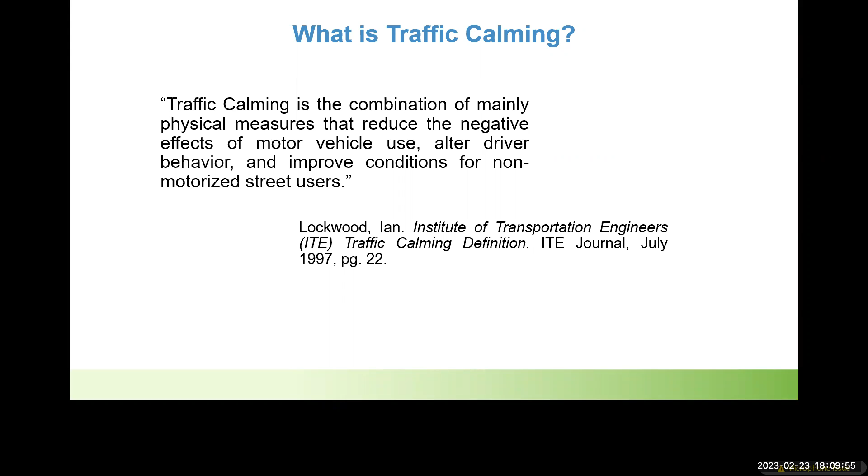The traffic calming program in Ann Arbor is designed to provide residents with a formal process for engaging with the city in a partnership to perform a technical analysis of traffic concerns on local streets and explore potential solutions. It's a 5-step program. We'll briefly describe each step, but there's also a guidebook available online that has more detail on each step and the structure of the program if you want to review anything after this meeting.

Step 1 is the resident-initiated petition. The Fulmer Street project started with one of your neighbors acting as a petitioner who submitted a request to the traffic calming program that defined the area as Fulmer Street between Miller Avenue and Foss Street. They gathered signatures from other residents who lived in the defined area and submitted it to the city.

The requirement for the traffic calming program to accept that request is at least 50% of the defined project area must support the project, and a preliminary technical study must result in at least 10 points. So there's all the criteria that goes into that scoring.

This summary is available on the project website, but this is just to show you that 54% of the project area addresses signed the petition in support of this project, and your preliminary study resulted in 22 points. If you want to look at the detail of how those points are broken down, it's available on the project website, which I know I keep referencing. If you didn't catch it at the beginning slide, it'll be up there on the last slide.

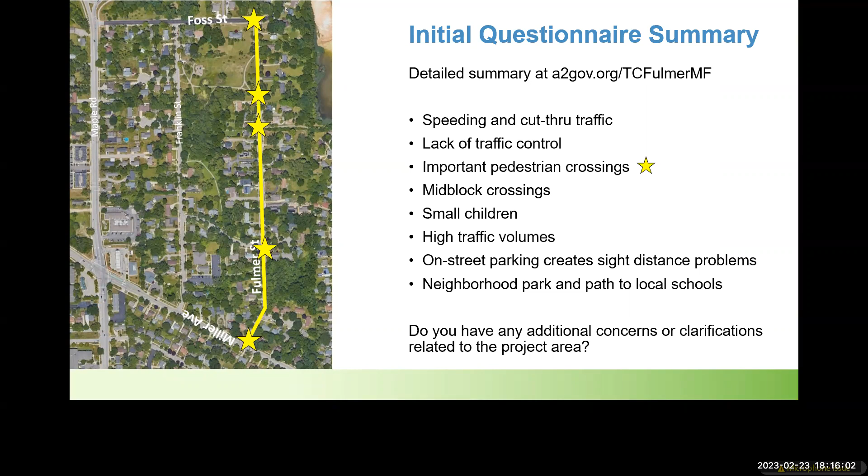Okay, so I'll definitely take note of that, thank you, that was helpful. So that feedback, and then what we've collected from the initial questionnaire, that's what we took in developing our starter idea here in step 3.

So step 3 is where we are today, where most of our focus will be for the rest of the meeting. But before we present the starter idea and do the polling, we'll do an orientation on the device toolbox that's described in the program's guidebook.

I'm going to launch another poll. This is just a quick poll to see how familiar people may be with the guidebook. Question reads: have you reviewed the traffic calming guidebook, specifically the device toolbox found on pages 9 through 12?

We'll give it just a moment or so longer before we end the poll and share the results.

So it seems like most people, majority of people have at least looked at it. Some might need a refresher, but we do have some people who haven't had a chance to look at it yet at all. So we will kind of speed through, but want to make sure we pause for any questions along the way.

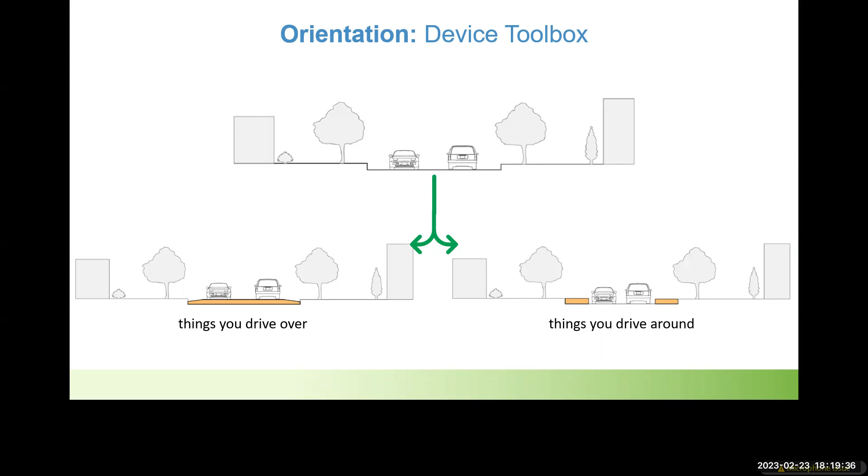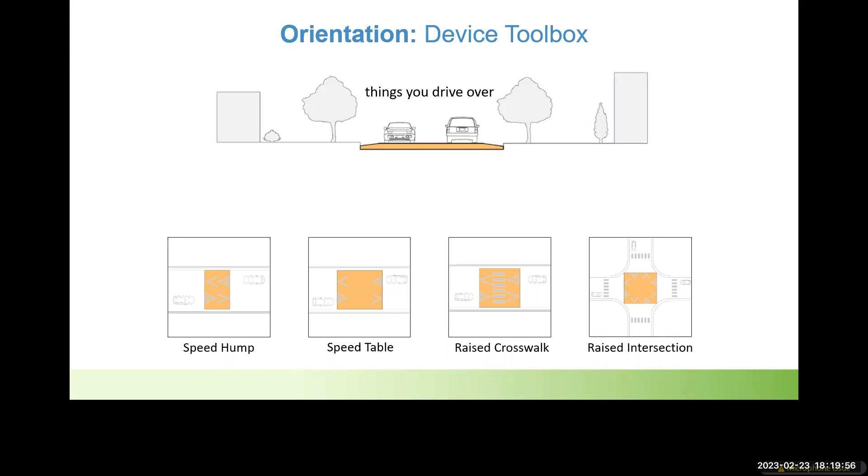Things you drive over are devices that slow traffic by creating discomfort if traveled over at a speed exceeding 25 miles an hour. The toolbox presents 4 devices that fall under this category, including speed humps, speed tables, raised crosswalks, and raised intersections.

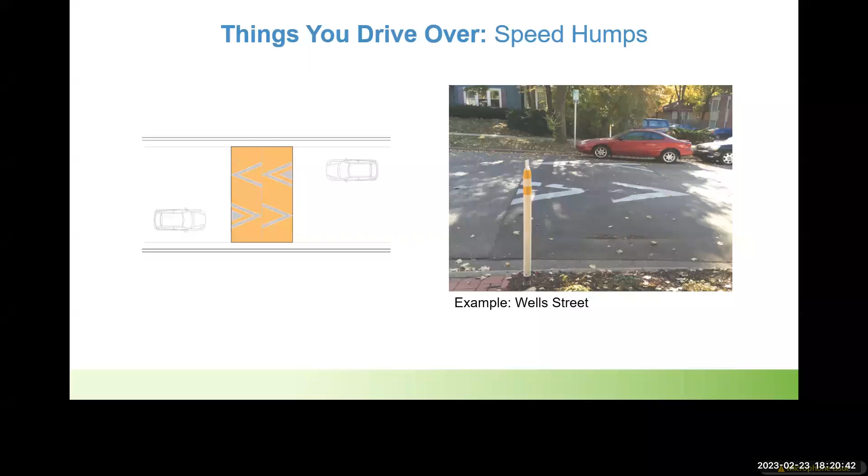A typical speed hump diagram is shown on the left, and an example from Wells Street is shown on the right. Speed humps are typically 12 feet long, 3 inches high, have a parabolic shape, and extend the full width of the street except for the gutter. Studies have found benefits from speed hump treatments, including speed reductions, traffic volume reductions, and crash reductions. Some other notes: the height is designed for ease of bike usage and bike safety, and if previously permitted, vehicles can park on speed humps. Also, trash cans can be placed on speed humps if necessary.

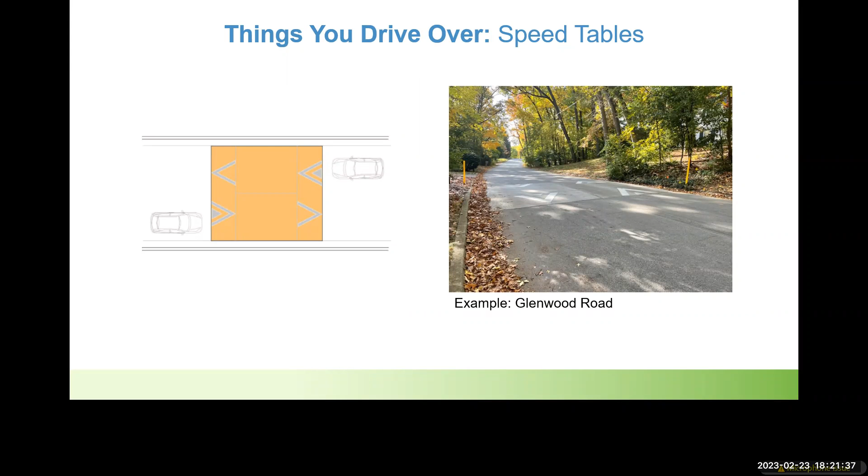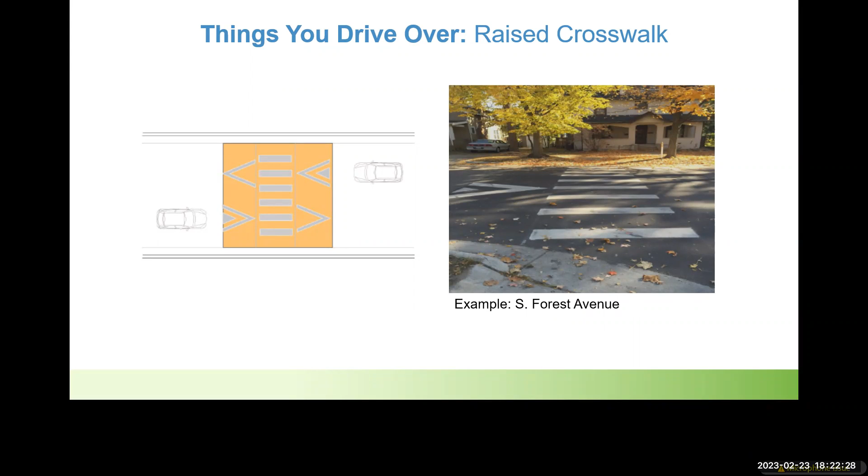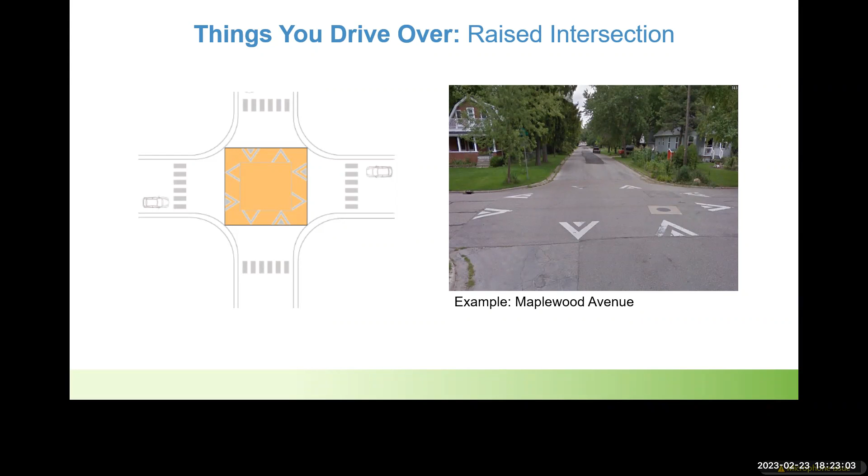If there are any questions about devices you drive over, please raise your hand or use the Q&A function. Okay, I'm not seeing any questions, so we'll move on.

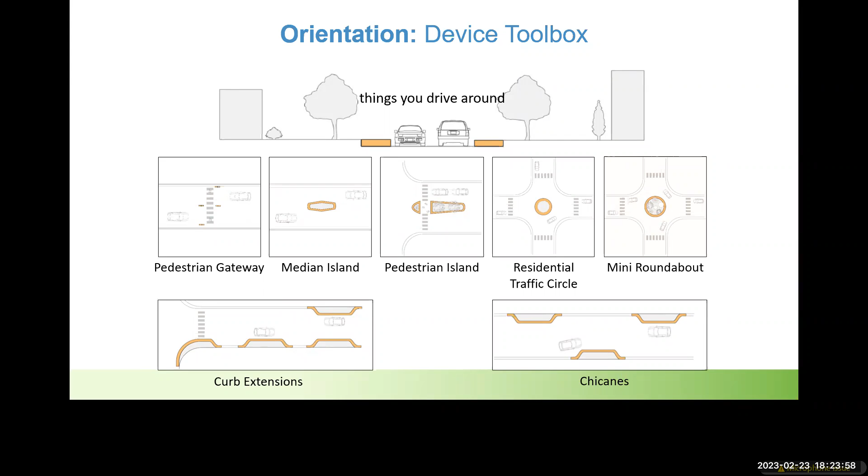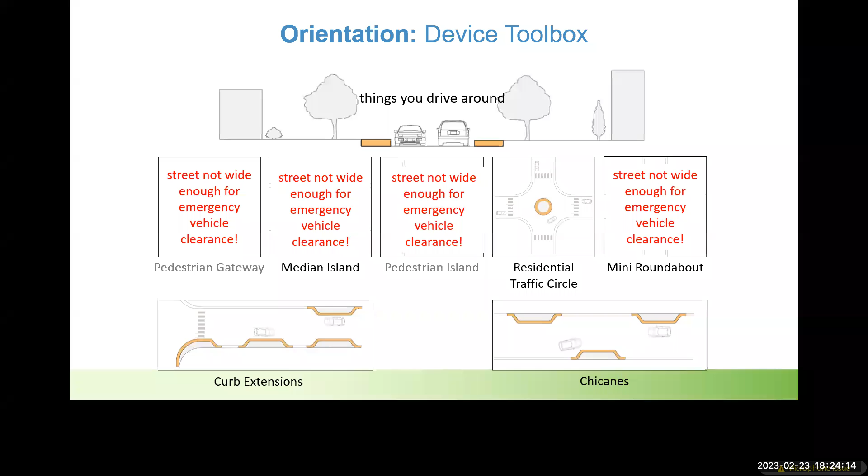The other group of devices in our toolbox are things you drive around. This type of device slows traffic by creating the perception of less room for error in a road that's visually or physically narrower. The device toolbox presents 7 devices that fall under this category, including pedestrian gateways, median islands, pedestrian islands, residential traffic circles, mini roundabouts, curb extensions, and chicanes. The next few slides will describe each of these devices except for pedestrian gateway and mini roundabout. These devices have been omitted from this project due to street width requirements set by the fire department and conflict with existing traffic controls.

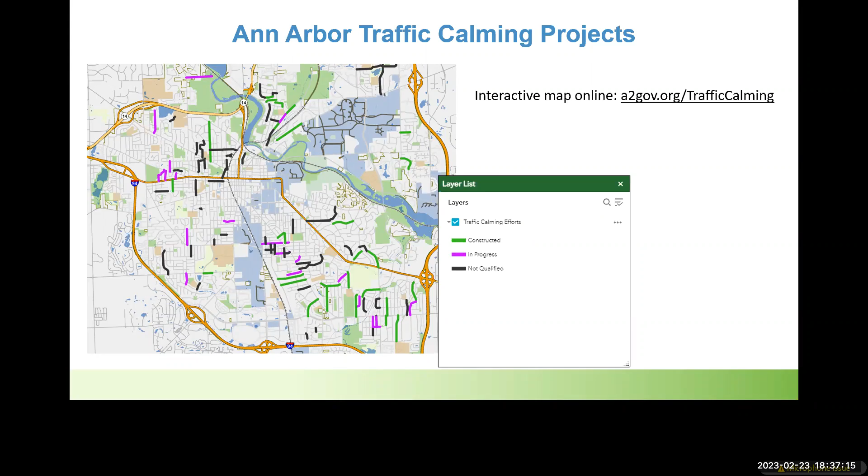Okay, so now that we've covered what devices from the guidebook are applicable to Fulmer Street, we'll present the starter idea. Again, this is a draft plan that we've created based on the data collection, including feedback from the initial questionnaire and that preliminary traffic study. We'll show each of the proposed devices in the plan, then take time to discuss and answer any questions, and then we'll do polling. This is the starter idea, again the draft created from information gathered in steps 1 and 2. We've proposed 4 devices throughout Fulmer Street - we see them working together to create a traffic calming effect on the entire section of Fulmer. I'll go through each device one at a time, get some feedback, and move on to the next device.

Device number 1 is a raised crosswalk at the Garden Homes Park entrance. There are currently sidewalk ramps on both sides of the street, and because those ramps already exist, we chose to put a raised crosswalk there. There aren't any other signs or facilities to alert drivers that pedestrians may be crossing, but since there are already sidewalk connections, we can install a raised crosswalk that highlights pedestrians, raises them up—especially shorter persons—and provides pavement markings clearly defining that area.

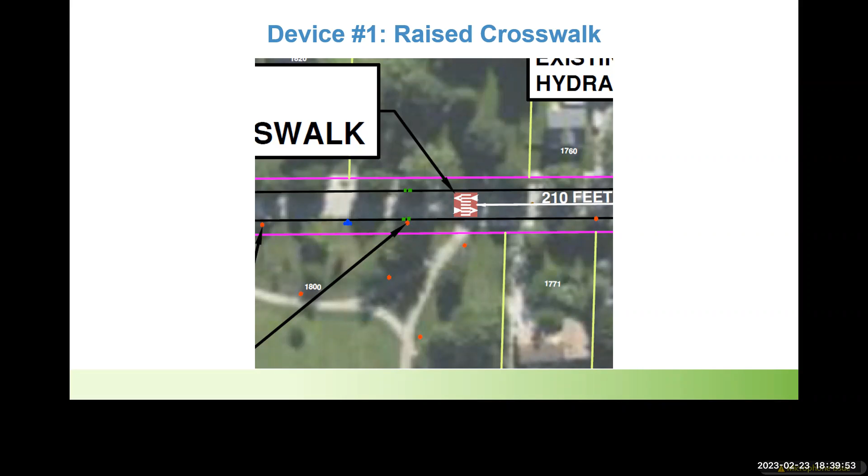Were there any questions on raised crosswalks in general or this specific device? No, I don't see anything. I'll move on to the next device.

Device number 2, we've proposed a speed hump, somewhat between 1658 and 1660 Fulmer Street, between the path to the Hatcher Crescent neighborhood and Garden Homes Drive or Garden Homes Court. Some initial questionnaire responses stated there used to be speed humps along this street before, and there was some favor for using them again. This location was chosen to give proper clearance from the fire hydrants on the street, account for the driveways, and keep it spaced between the other devices as much as possible.

Speed humps can also result in speed reduction, traffic volume reduction, and crash reduction. Some things to keep in mind: legal on-street parking is still permissible on speed humps, and they're designed to be safe for vehicles and bicyclists to travel over—the maximum height is designed so it's still comfortable for bikes to ride over.

Were there any questions on device number 2, or speed humps in general? Go ahead, Ruth. Okay, can you hear me? Yes, all right.

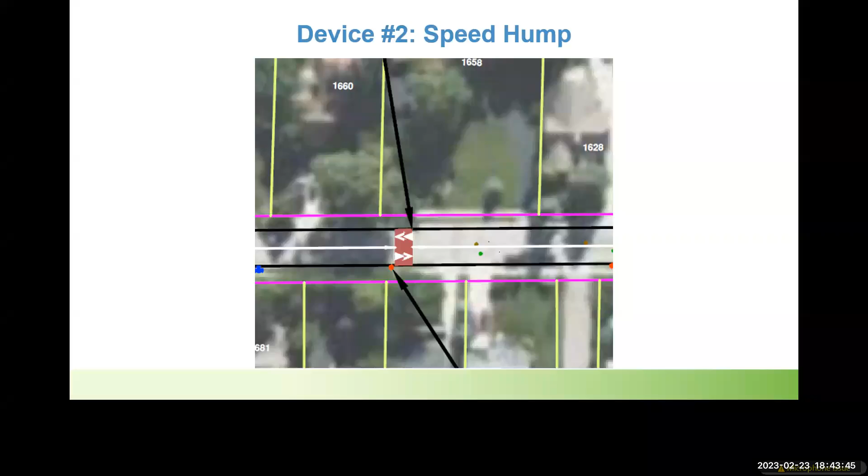Device number 3 is a residential traffic circle at the Garden Homes Drive, Garden Homes Court intersection. Again, to achieve a traffic calming effect throughout the entire stretch of Fulmer, it's important that devices are spaced as equally as possible, so given our constraints, we knew we wanted a device here.

Traffic circles don't change existing traffic control, and their size is pretty small. Garden Homes Drive and Garden Homes Court both have stop signs at their approaches, while Fulmer Street is free-flow traffic, and that wouldn't change. We wanted to maintain the traffic control that's already there since we can't add anything like additional stop signs.

But this does have the ability to reduce speed since it's something that drivers would need to navigate around. So those drivers coming down Fulmer would need to navigate around it. So it would be a device that can reduce mid-block speeds, intersection crashes, and overall crashes.

A couple things to consider with traffic circles is that they do have a minimal effect on cut-through traffic. Left turns might be difficult for larger vehicles. They might shift vehicles closer to crosswalks. Bicyclists navigate with traffic around the circle. Landscaping would not be an option in this project, just to maintain that emergency vehicle access, because they need to be able to drive over this if needed.

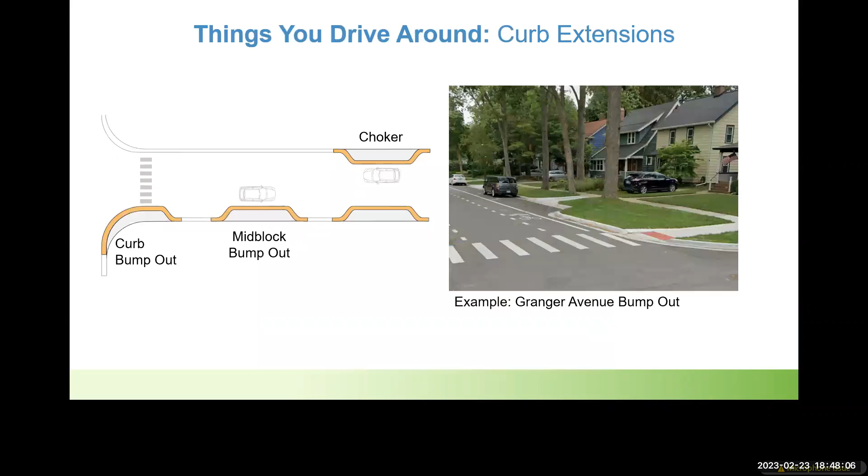There'd be a pole in the middle with a sign? Nope, no sign. That was a request from the fire department. There is regulatory signing that goes along in general with the traffic circle, but it could be placed ahead of the intersection. And in this case, since the fire department has requested the mountable curb and is possibly going to need their vehicles to be able to mount it, that's why the center is going to be paved for this option.

So Lori, Christy, I can add another example. I don't know how familiar all of you are with Broadway Street over by the hospital. They just put in a new one - it isn't a residential traffic circle, it isn't a roundabout, but it is a mountable one, similar to what the fire marshal is interested in. If you guys poll on this one and you're interested, we can add that image of what it generally would look like. It doesn't have anything other than mountable curb - it's raised, it's concrete, that's it. Thanks, Andrea. It's at Broadway Street and Gordon Lane. It's a very weird intersection, but an interesting one.

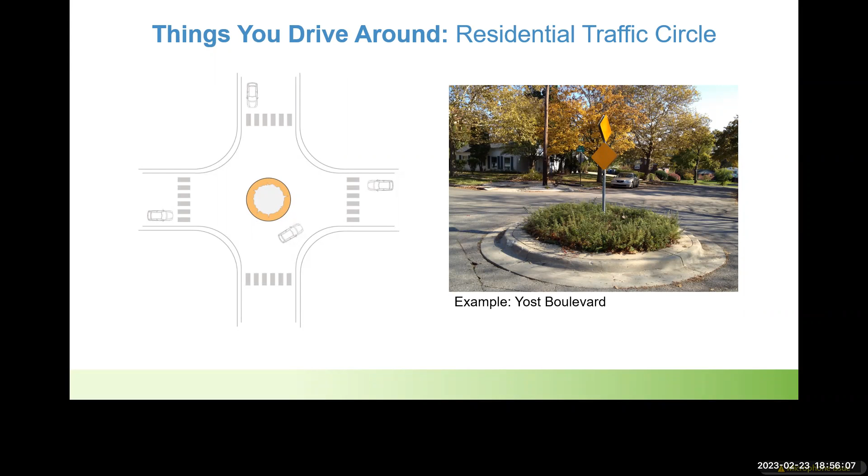Well, raised devices or any installed traffic calming devices should last the same length as pavement. They are inspected as needed, and we're in the process of creating a plan, because all of the devices that have been installed since 1996, when we first started installing them, are now just hitting the point where they need to be replaced, kind of like pavement.

So it's pretty much the same life cycle as the other stuff. I hope that answered the question. We're just now seeing that we have to start replacing and maintaining them. The pavement markings that go along with devices typically get refreshed as people go through the neighborhood, as part of our pavement marking contract.

If you notice there's an issue, we always send an inspector out to look. So if pavement markings look off, or a device has been destroyed because of—heaven forbid—something, we've seen very interesting things, we'll go out there, look at it, and get it put into the resurfacing program as a maintenance item. So hopefully that addressed your question. We're now just seeing that we're having to maintain the devices that were put in back in the 1990s.

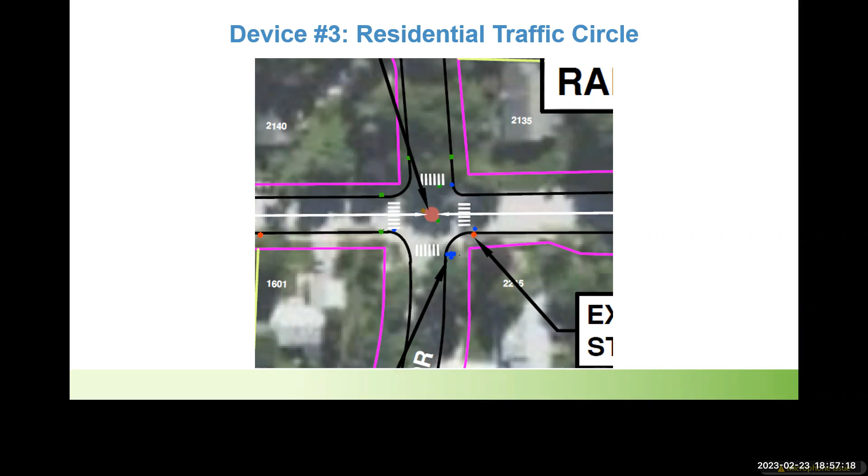So as a reminder, raised crosswalk treatments can show speed reduction, traffic volume reduction, overall crash reduction. Some things to keep in mind: installation has to be compliant with the ADA, Americans with Disabilities Act, and parking on a crosswalk is illegal, raised or not. So, none of these devices will take away any existing legal on-street parking.

So that's circling back and answering that other question. Was there any comment or question on this device? Ruth, you can go ahead. This is my husband, he has a question. Okay.

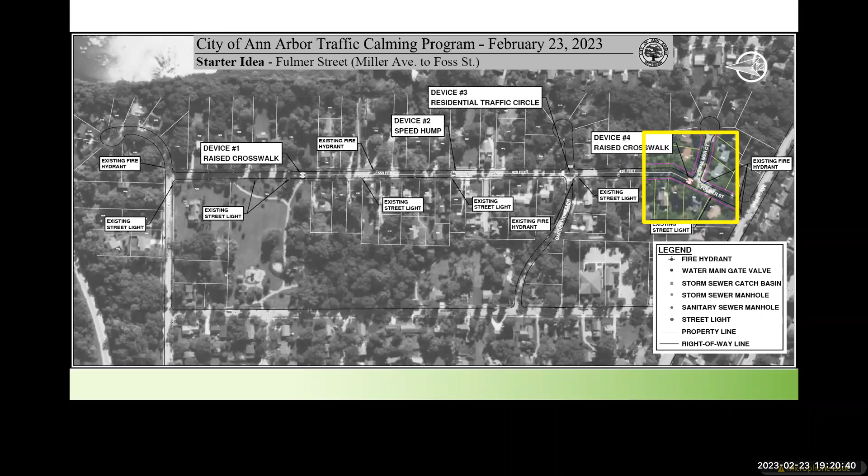Okay, beautiful. Polling's done, but before we wrap up the meeting, and before we revisit those couple devices or open the floor up, I just want to go over what the last few steps of the program are. So after today, the next step that you can expect is meeting number 2.

Meeting number 2 is going to consist of 2 parts. One is a self-guided tour, and then another meeting just like tonight. That meeting is scheduled for May 3rd.

Following today's meeting, we will post the presentation and the recording. It'll be posted to the project website in the next couple weeks. We'll also post a summary of the polling and then use all the feedback we're getting to create our preliminary plan.

So for the self-guided tour, you'll receive a mailing packet at least 2 weeks ahead of that May 3rd meeting. The packet's going to contain the preliminary plan, device images, and device descriptions, which can all be utilized to do a walkthrough of Fulmer Street prior to the meeting.

The approximate device locations will be marked in spray paint along the pavement, and there'll be a post in the ground to display the device image and description nearby that location. You can also, if you'd like, use Google Street View to conduct the self-guided tour and reference that packet.

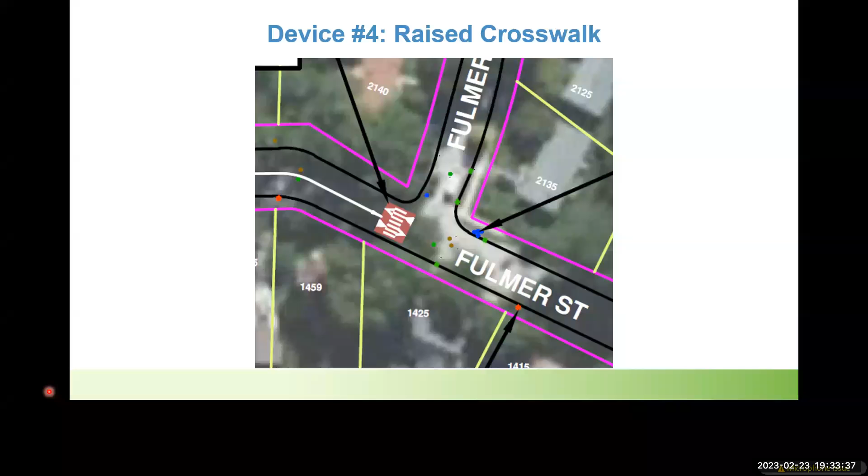There will be a discussion summary for this meeting to give some kind of immediate feedback to you. And then if there are any additional comments that you have - Hey, Christy, yes.

I have a recommendation. In previous projects we've done, we've had neighborhoods with similar responses to devices where it's kind of divided. So we can go back with everything we've heard, which I think you've written down, and Lori and Christy will come up with a plan that best addresses what they've heard from this feedback, and why they might not have done something else that was said. So we'll have a why we're doing this and then why we didn't do something. Does that seem okay here? Does that make sense, Christy and Lori?

Yes, yes, yeah. We can just do a little bit more work explaining why we didn't do something. Maybe that's because we couldn't put a crosswalk in due to structures, or something outside the scope of this program that won't happen this year, next year, or the following year. So that's just an example of things. We've done that in the past on other projects where we've explained why we didn't do something the community wanted, but here's what we heard and this is what we've done to address it.

But I see you guys have some more hands up. Yes. Rachel, if you're able to, you can unmute if you had anything to add. But there are some questions in the Q&A I can also address.

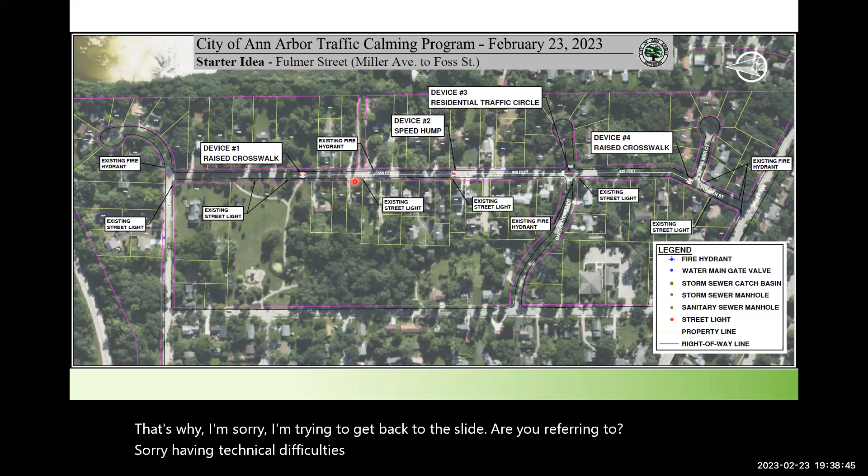Sorry, having technical difficulties over here. This section, you're saying you would like to see something in this section here?

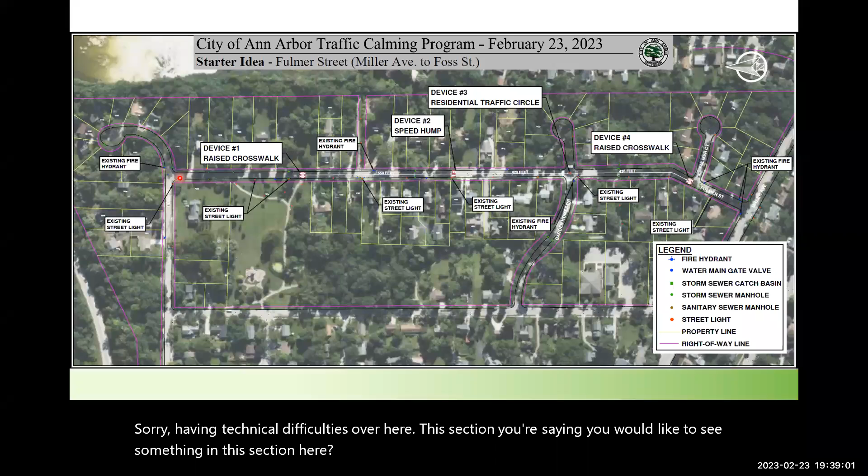Yes, basically from where Fulmer hits Foss, a little bit past that path that connects Garden Homes to the Crescents. I see kids walking through the park to get there, and I know the raised crosswalk is great and I 100% support that. But I almost feel like with everything being proposed further south on Fulmer, it's not quite enough for that stretch, which seems to be of most concern, at least from my perspective. And I know a couple other of my neighbors feel the same way.

Okay, I just want to make sure. So Ruth, you're saying you would like to see something closer to this path? Yes, 100%. Okay, thank you.

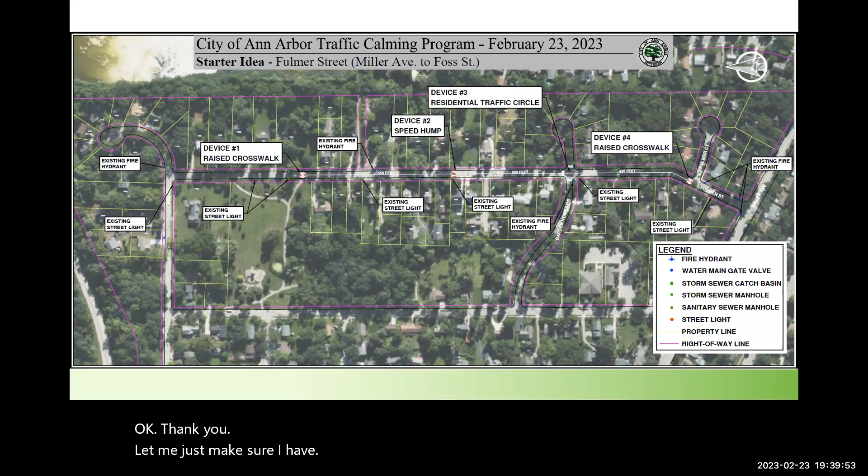Let me just make sure I have. I see one more hand raised from Amelia. You can go ahead and unmute if you'd like. We do have to wrap it up though after this, but go ahead, Amelia.

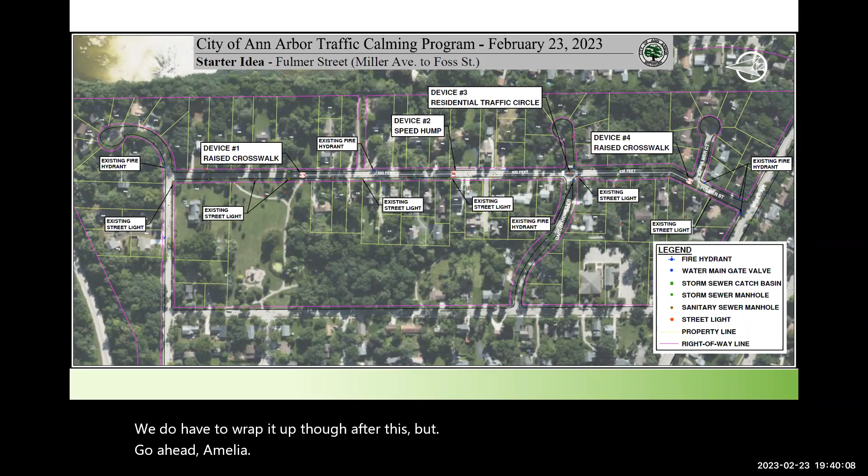I wanted to support what Ruth was saying, and I'm finally in a quiet spot so I can do that. I live in the house directly across from the path. I think most of the traffic comes in from the north, and a lot of the time it's when high school gets out, and then there's other times like rush hour.

It's that time that concerns me the most, because that path has middle school kids, elementary school kids, and they come down on bikes, on anything with wheels, on their feet, and they don't look. I see them do it all the time, my kids have done it. And then at the park, there's all kinds of people that cross into that park from anywhere along that stretch, there's sort of that sidewalk where it feeds into the path.

People just walk across the street there all the time, and that is the place where people really, really speed through. So it's kind of the same thing that Ruth already said, but it feels like there is not a whole lot there. I feel like that is the worst part.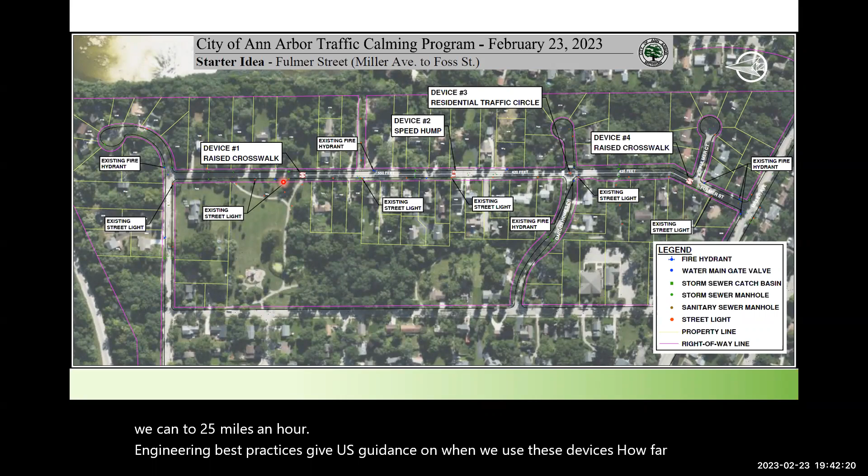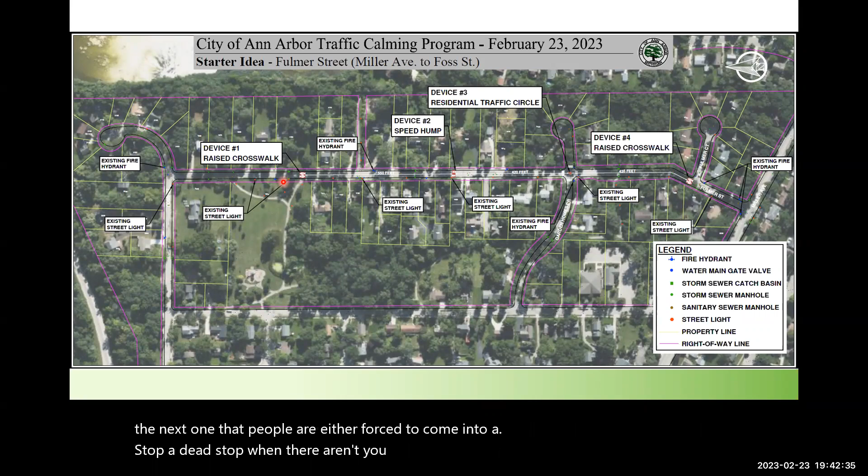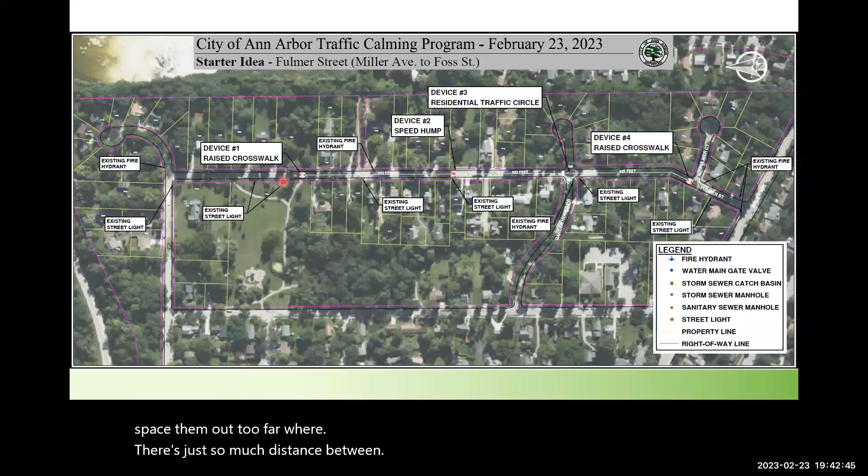We don't want to put a device so close to the next one that people are forced to come to a dead stop when there aren't pedestrians in the roadway. But we also don't want to space them out too far, where there's so much distance between device 1 and 2 that vehicles are just speeding up in between them.

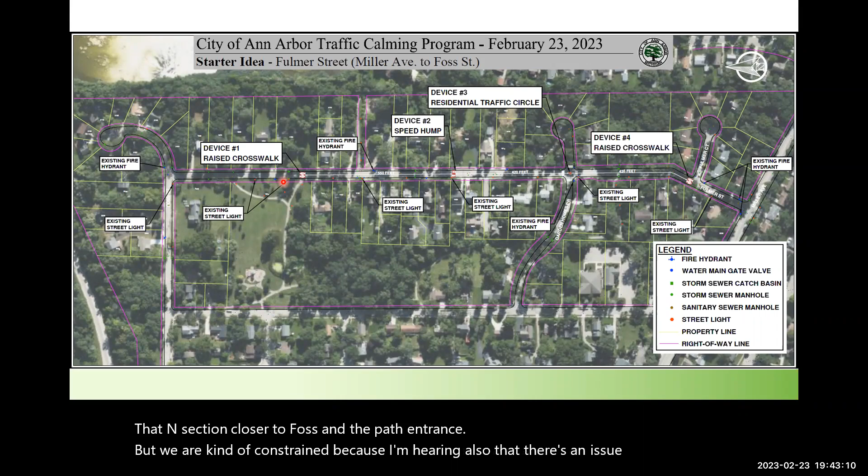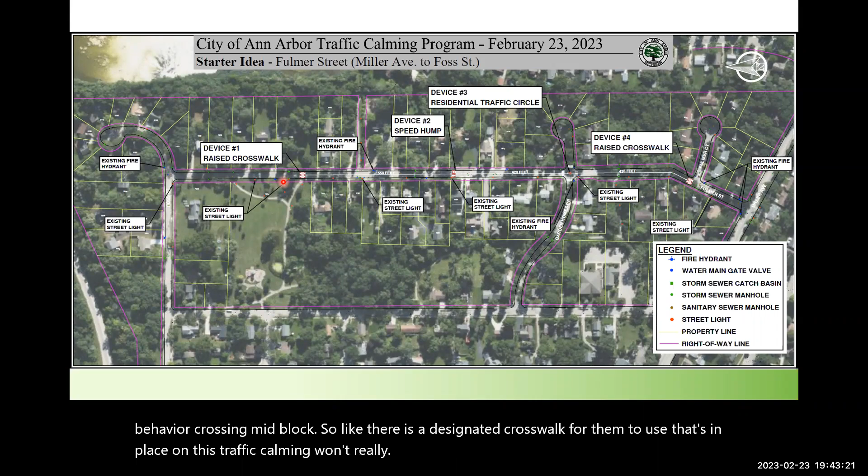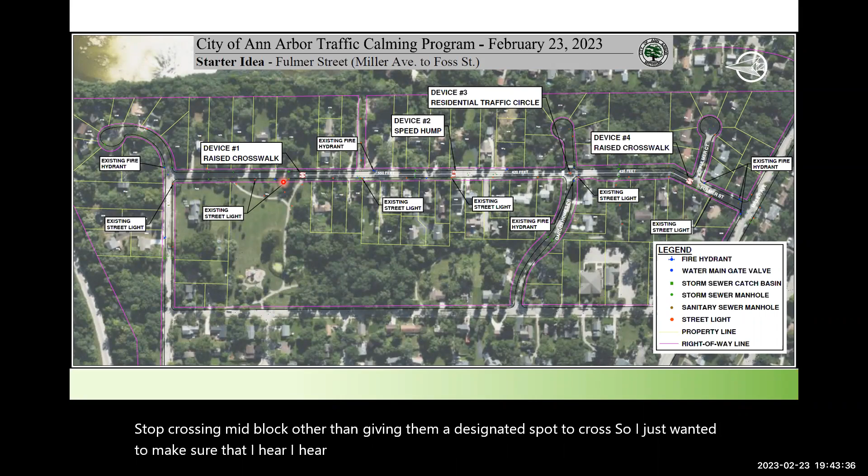That being said, I definitely do want to revisit that north section closer to Foss and the path entrance. But we are kind of constrained because I'm hearing there's also an issue with pedestrian behavior crossing mid-block. There is a designated crosswalk for them to use that's in place. This traffic calming won't really provide a solution for them to stop crossing mid-block, other than giving them a designated spot to cross. So I wanted to make sure I hear your feedback, but I'm hearing two different things, and some of those things may not be fully answered by this program.

But that being said, I definitely do want to revisit that section near Foss and the park entrance, to consider either moving around some of the devices or adding another device, to make sure that we feel comfortable that traffic calming is going to extend to both limits of the project area.

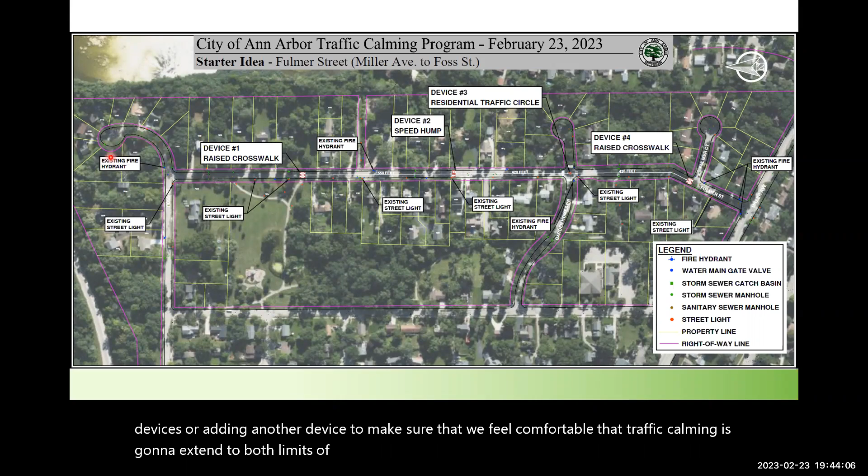And I hope that provided you with... I hope that addressed your concern, Amelia. Yes, thank you. It did.

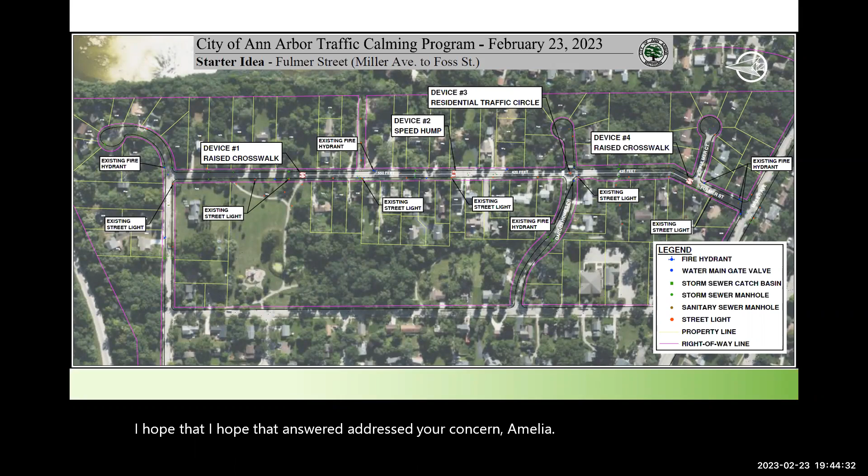I'm looking at that stretch also, but I'm also just looking at Foss in general. That's a pretty big straight stretch, sort of the big entrance, and there's nothing there. Along Foss, that's outside the project limit. Oh, I see. Okay.

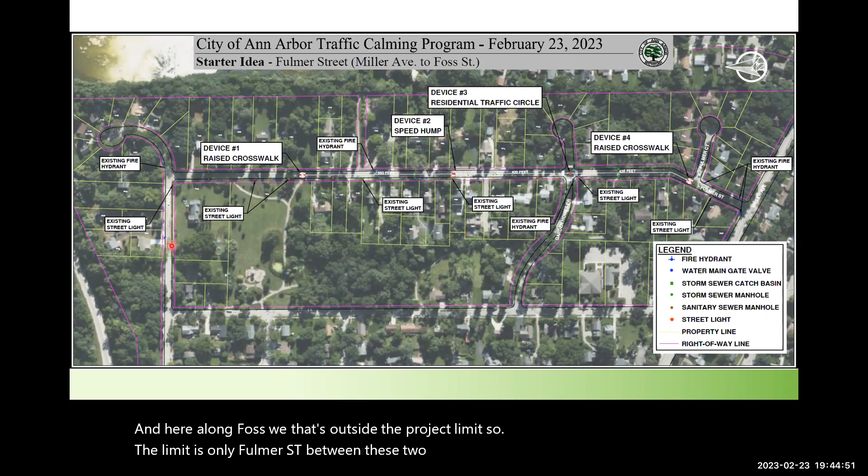The limit is only Fulmer Street between these two intersections at the end. So with this project or petition, we wouldn't be proposing anything specifically aimed at calming traffic on Foss. We did look at a raised intersection here, but there's a hydrant and some other issues with the utilities that we turned away from and started looking at other things. But knowing how some of the feedback is, we can go ahead and revisit.

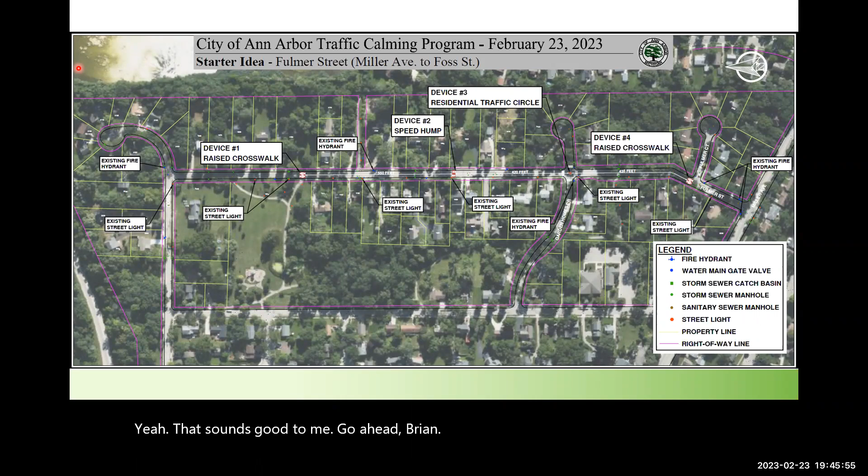Am I unmuted now? Yes. Great. I'm Brian's wife, Emily. Hi, Emily. Hi.

I wanted to put my two cents in, and I wanted to highly support what Ruth and Amelia were both talking about. One of my biggest concerns is we live right next to the path, and the path is essentially the easiest access route for kids during school time, or any bike or anything. The easiest way to get onto that path, since there is no crosswalk there and no access to the path, is through our driveway. There have been more than 20 times in our 3.5 years of living here where, in backing up, we have backed up as people are coming up our driveway, or as kids are cutting across our lawn to get down onto the sidewalk.

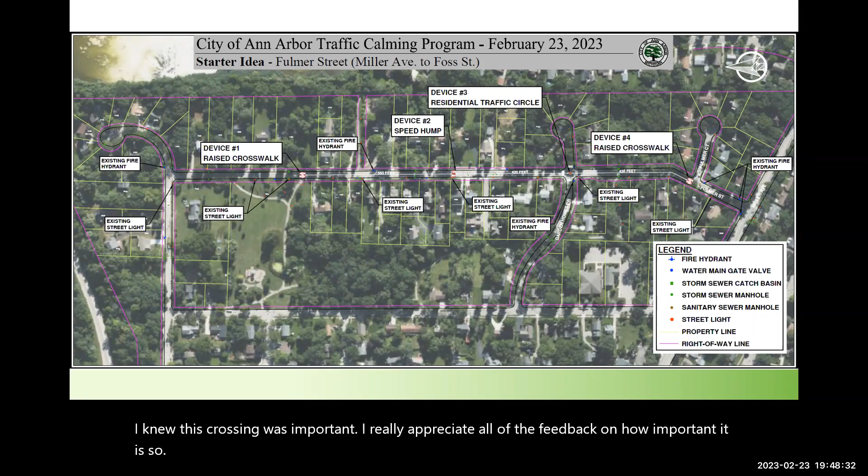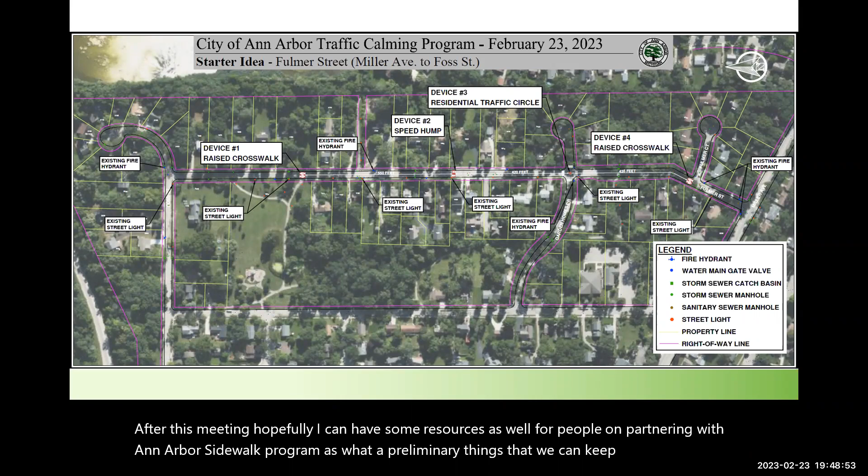Thank you, Emily. I knew this crossing was important, and I really appreciate all the feedback on how important it is. So definitely with the discussion summary we provide after this meeting, hopefully I can have some resources for people on partnering with the Ann Arbor Sidewalk Program, as well as preliminary things we can keep looking at before the next meeting date for that path entrance.

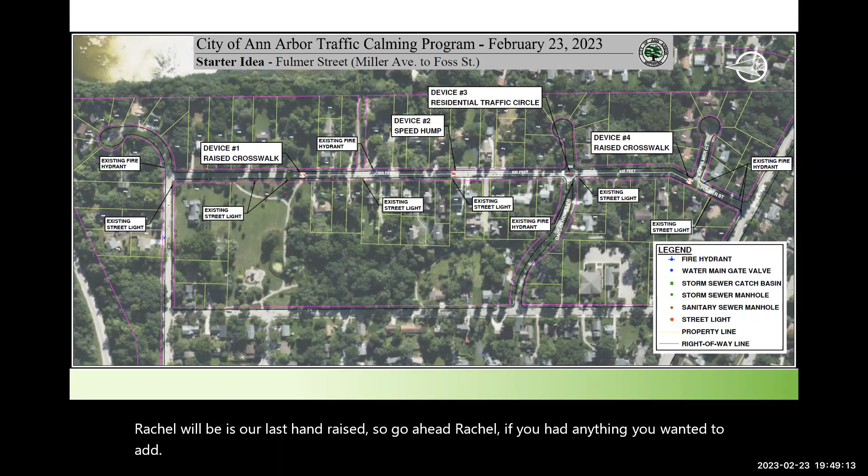I just want to underscore what both Emily and Amy and Ruth have all been saying. A few years ago, Amy went out and bought some of those plastic neon 'slow down, kids live here' signs and put them in the road, and they were hit repeatedly. That was right across from the path. That was our homegrown solution to trying to slow this down. I think a better way to think about the path is, as we do, the Wines and Forsythe super highway. It's really highly trafficked by kids and those cars that are speeding. So that really is a real focus for us on the street. Thank you.